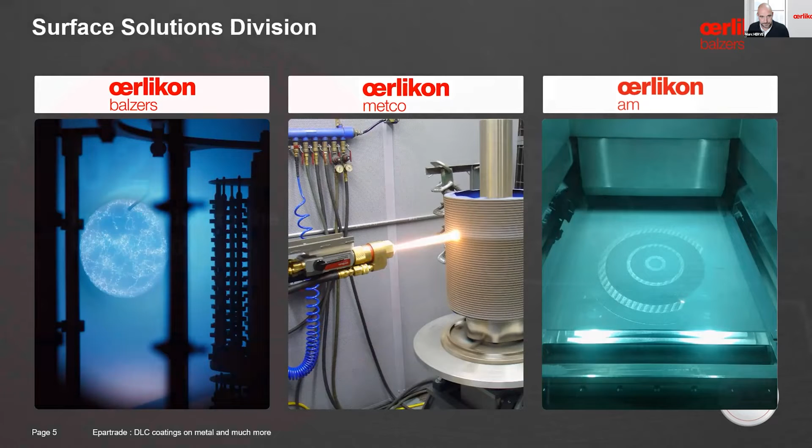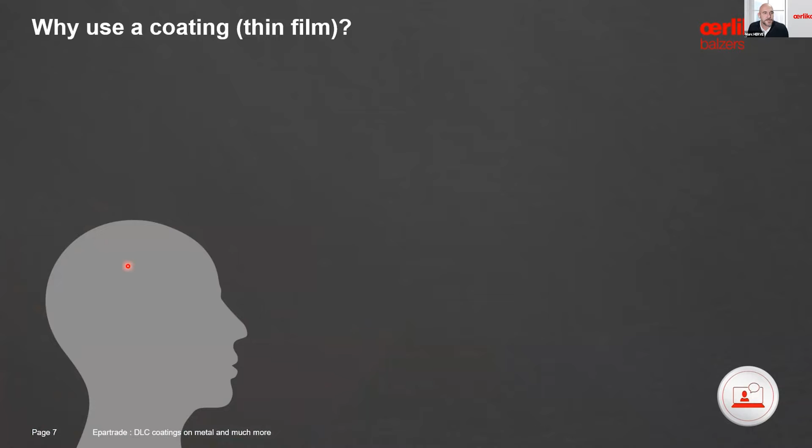Last time I talked about it, but I always want to refresh quickly. When we talk about coating in our case, we talk about very thin coating, about 3 micrometer thick coating. And very often the reason why we use this kind of coating is for the very typical topics: reduce the friction, reduce the wear, overall improve the global performance of a system. It could be on the engine or other parts, we will see that later, or simply because we want to increase the durability and the lifetime of the parts.

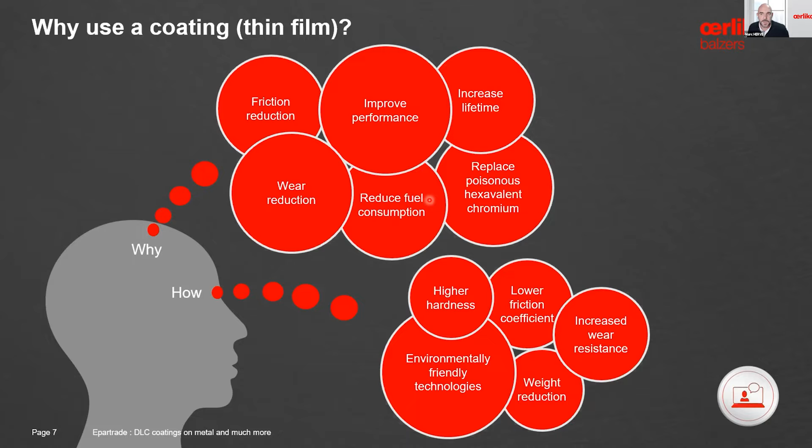How can we do that? 3 micrometer, very ultra thin coating, but we bring a very high hardness and a very low friction coefficient. It is a clean process. There is all this discussion about sustainability. Thin film coatings are actually clean coatings. They don't have any poisonous reject or anything. So we are covering a lot of different things with our solutions. When we talk about coating, many people are thinking about paint. It is very often the idea.

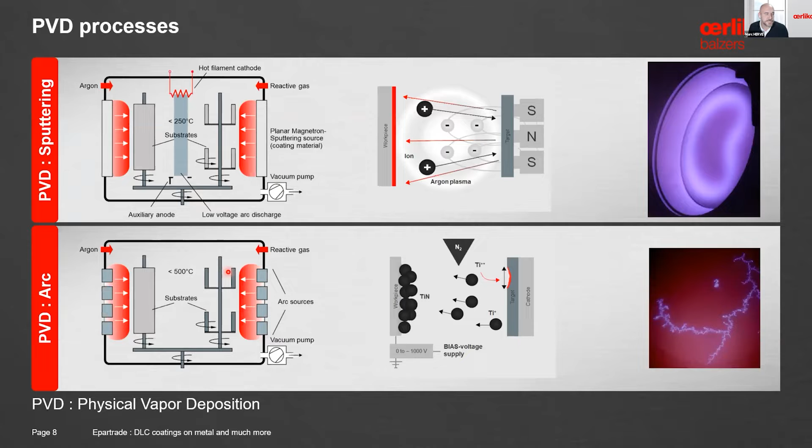Our coatings are made under vacuum inside a chamber, and we have different processes to apply the coating. We have the PVD coating, that stands for physical vapor deposition, meaning that we will have a physical target of the material that we want to evaporate for the coating we want to make. So if we want to do, for example, chromium nitride coating, we will use a physical target of chromium. In this process, under vacuum, all the parts will be in rotation. It will be made at different temperatures depending on the process, but at the end it will give us very high hardness, very dense coating to prevent the wear.

The other process that we use is to apply a very well-known solution, which is called DLC coating, so diamond-like carbon coating. We use a slightly different system. In this case, we will use only a gas environment to apply the DLC. And this is why the DLC very often is made at a lower temperature.

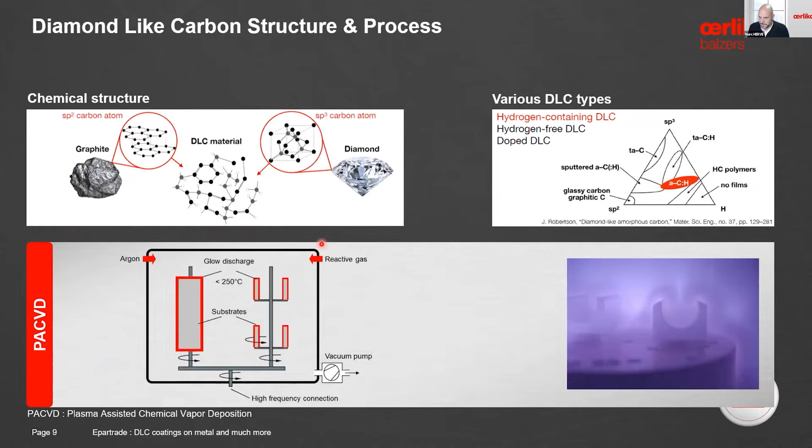So here, that was just very quick, just to remind you a little bit about the coating and the process. But I don't want to bore you too much with this kind of thing. The only thing that I really want people to keep in mind: DLC is not one coating. It's a very wide range, a very big family of coatings. And depending on the process and depending on the technology, you can have completely different properties on the coating.

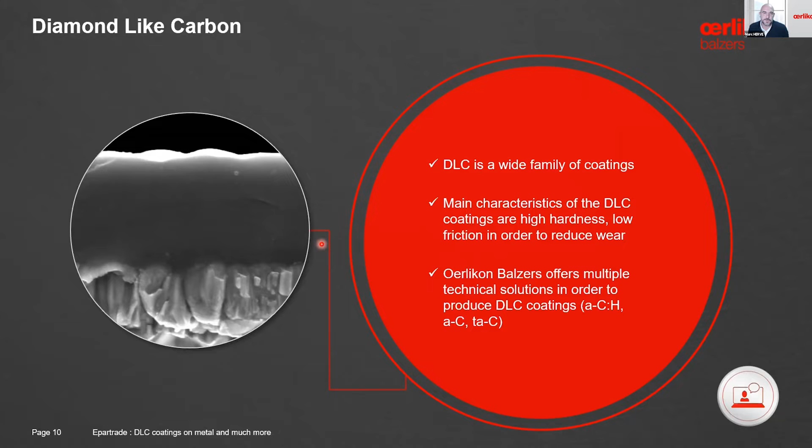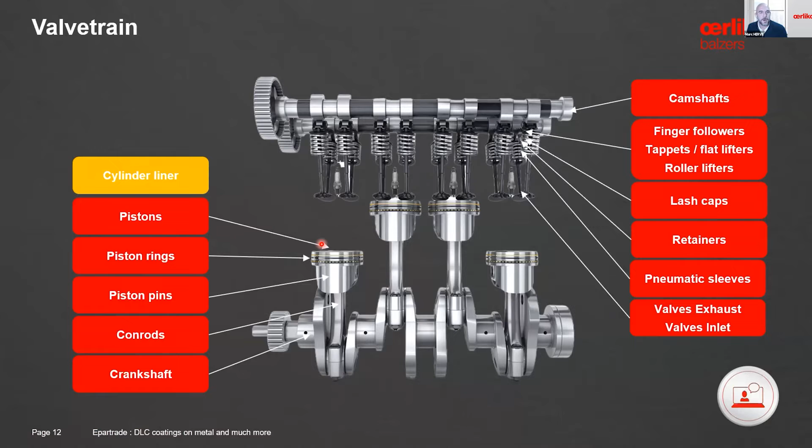But it's true that when we talk about coatings like DLC, we are thinking about friction reduction and wear resistance. And the good thing is Oerlikon today can provide all the different technologies and different kinds of DLC you can find. So, the title of the presentation today is coating on metallic parts and more. When we talk about metallic parts, if I look at the valvetrain, this is where we have most of our applications at the moment. You can see here a quick range of all the parts that we can coat. This is what I discussed last year, giving some examples.

But it's true that today, parts like camshaft, flat lifter, bucket tappets, roller lifter, piston pin, these are now very common parts that you can find in almost all engines at the moment, whatever the series, whatever the level, to be honest. When we are on the top part of the engine, we look at DLC mainly to reduce the friction. If we talk about the valve, we look more at tougher coatings that can resist really high temperature. And if you go down, we are again back to friction reduction on the piston, and also on the piston ring. So on the valvetrain, many parts are today coated.

I remember 20 years ago, there was a project in France and the OEM wanted to make the black engine. So 20 years ago, they shipped us all the parts from the valvetrain to be coated. But it was more for the communication than really any engine testing. It appears that now it is actually the case. Almost all the parts in the valvetrain are coated. So it is great for us, but it also shows how coating is now a necessity for the new rules and what we are asking the new engines to do.

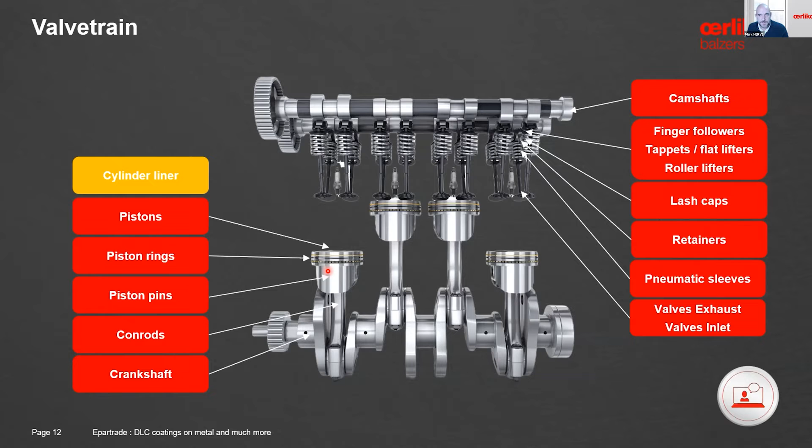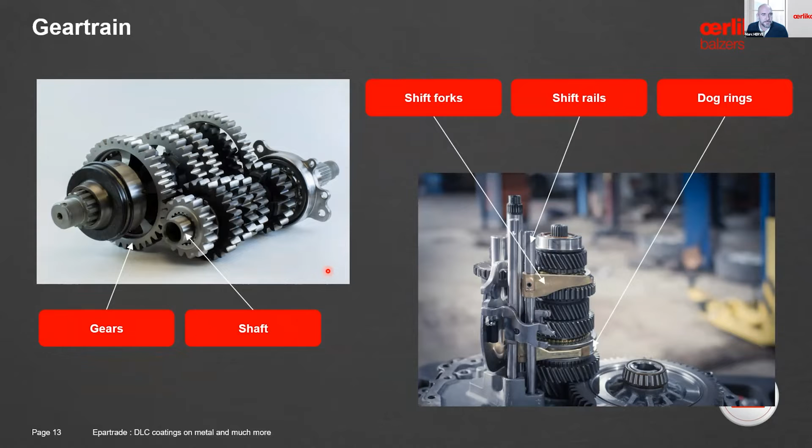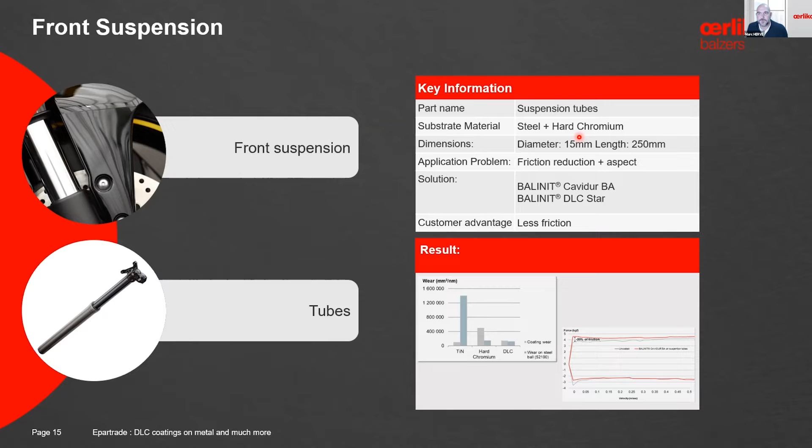So valvetrain is one of our biggest applications, but we also have a lot of applications inside the gear train where we can coat a lot of different parts, the gears themselves, but also the shaft, the selector fork. But again, we are still a lot into metallic parts and substrates. Another application that we face a lot is all about the suspension, rear or front. And here, in many applications, we actually apply the coating on top of the existing hard chromium that you already have on this kind of part. Overall, on all these steel parts, the main topic is reducing the friction and reducing the wear. So here, I wanted to go really fast because I think it's now very well known and used. Of course, there are always questions, but it's now something very common.

But when you look into an engine, in fact, there are not only metallic parts. There are a lot more things. And as you mentioned before, Joe, you find a lot of elastomers and O-rings and other parts that also have a lot of wear and a lot of friction. So a couple of years back, we acquired a company that has a very interesting technology, which is, again, a DLC coating. When we looked at the properties of this coating, it was really incredible, because first, the hardness of this Balinit Milubia coating itself is really, really high, much higher than any other DLC that we can apply at the moment. Well, that was not the main interest.

The biggest interest that we found in this coating and this technology is that we could apply the coating on almost everything. Or at least, a lot of non-conductive substrates that we could not easily coat in the past. So today with this solution, we can apply the coating on different carbide surfaces, silicon carbide, etc. We can apply the coating on different ceramics, alumina, other parts. We can even apply the coating on PEEK.

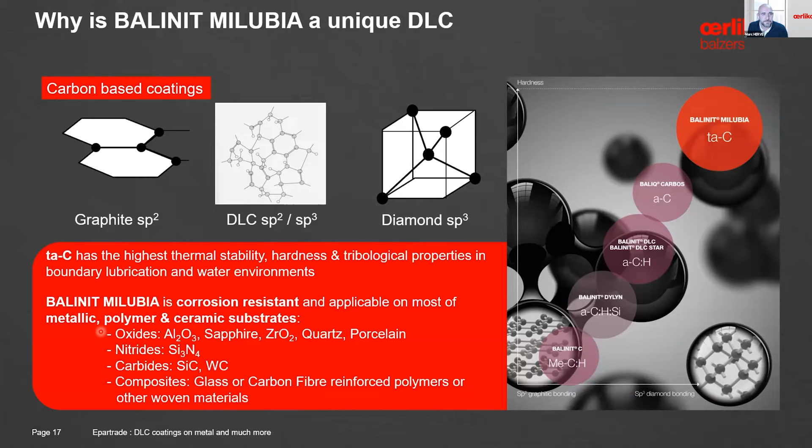But at the time, we really thought, can we do something else? Can we apply the coating on elastomer? So when we thought about it, the first question was, if we had to coat an elastomer, what could be the blocking point in putting a coating on this kind of substrate? First, it is a non-conductive substrate, but with Milubia, we can have an answer. The other thing is, as I said at the very beginning, most coatings are made at pretty high temperature, 250 degrees and higher.

And if you want to coat elastomer, that might be an issue. One of the key points of the Milubia coating is that it is made at very low temperature. It's actually made below 100 degrees C. We even measure coating around 80 degrees C. So, non-conductive substrate, very low temperature, and we can do from a few nanometers to a couple of micrometers.

And today, when you say all that, we are not talking about a very small R&D chamber. We are talking about definitely an industrial process where we get a chamber which is up to 1 meter height for the production. So it's definitely production oriented, it's not an R&D thing, at least for the coating. So we had everything in hand to be able to develop the new solution.

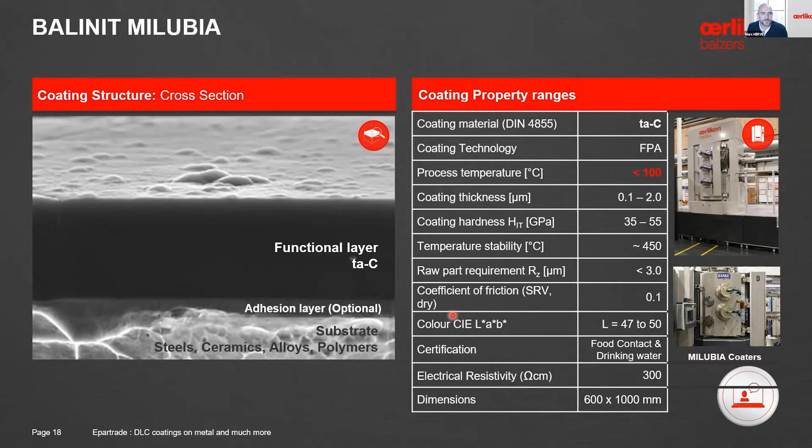So what we did at the time is that we said, okay, we cannot start running around and ask everybody we know if we can coat some parts with our solution. So we went to LRCCP in France, who had a lot of experience on elastomer, and they had a specific tribometer, etc. And we asked them, can we measure the benefit of the coating on your tribometer? So we just coated very small parts of elastomers, very basic NBR that you can find on many applications.

And what we saw immediately, so the gray part is the pin that you see here against the elastomer uncoated. You can see that the friction is definitely not great. It's still really high. And we were actually very surprised to see that as soon as we applied the sample with the Milubia coating on it, we dramatically reduced the friction. So that was our first lesson. Okay, friction can be reduced.

But then, if you look at the parameters of the test, my colleague who actually supervised the test told me that he almost fell asleep when he was looking at the pin sliding. It was so slow that it was absolutely not linked to the application or the reality that we are facing in motorsports. So we said, okay, we need to make our own test.

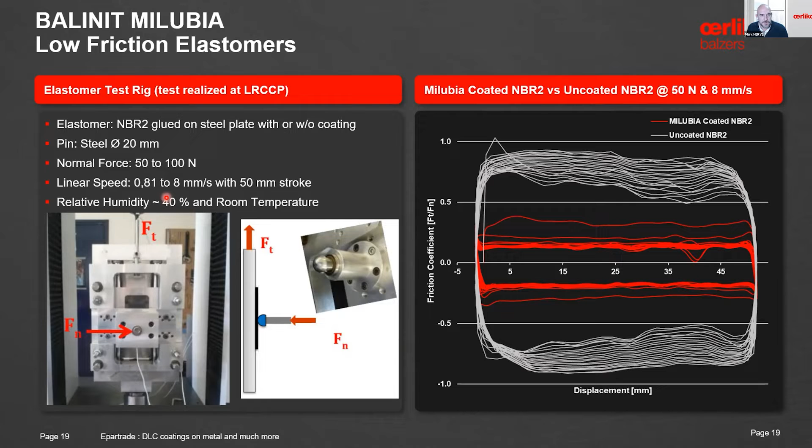So we came back to the office, we worked on our tribometer, and we replicated exactly the same thing that we saw before. Without the coating, we had a friction coefficient around 1. And with the Milubia coating, we were below 0.2. From our point of view, it's a massive improvement. So we were able to reproduce in the lab a very low friction on an elastomer. For us, that was a big step forward. But that was only the first step.

So what we did at the time, I reached out to a couple of friends that I know in the motorsports industry, and I said, look, I got an idea. We are talking about elastomer. We have a lot of experience when we talk about suspensions. Can we coat the inside of the lip of the seal, instead of coating the suspension tube itself?

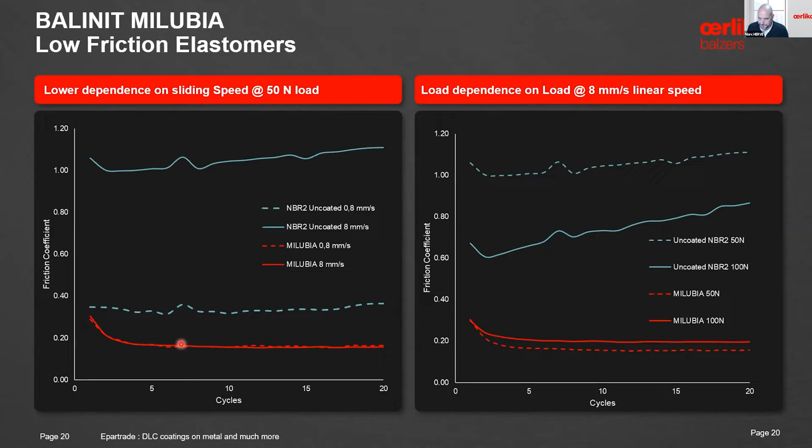At the beginning, my friend really thought that I was completely crazy because I told him a very hard coating on the elastomer, what about the flexibility, etc. So he was really not convinced, but he gave me a few parts because this is the joy of motorsports. If you don't try new things and extreme things, you never move forward. So he said, okay, let's go and make a test. So we coated the inside lip of the seal.

But the thing is, a tube is something around 250 millimeters long, while a seal is more 50, 60 millimeters in diameter. So the part is definitely smaller. So potentially, economically, for the same technical results, it could be much more beneficial. And everybody today is looking for the best performance at the best cost. So we were definitely convinced that there is something to do right now on elastomer with our new solution, which is in that case the Milubia.

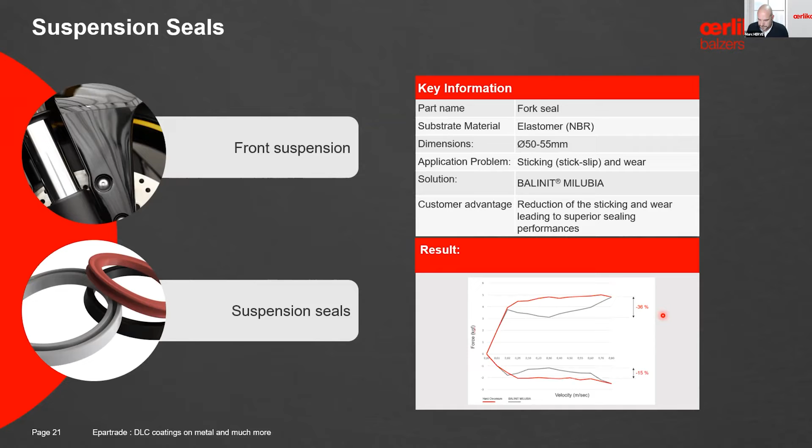And I have to say, right now we are busy testing a lot of things. A lot of seals, a lot of O-rings, etc., in many applications, in a lot of different environments, lubricants, oil, or counterparts. So we're still learning, but we have a lot of things ongoing at the moment, to be honest.

The good thing is, as I said, for the MILUBIA, as with most of the applications that we do, the idea is not to have this kind of product only for the track. We really want to push it also for the road and bigger volume in the future. But first, we know that in the coming months, coming year I will say, our focus will be the racing industry because we need to learn, we need to develop, we need to modify, we need to improve.

But it's definitely a solution that we're going to push. And you might see it very soon with many suppliers and racing cars or bikes, etc. I have no doubt about that.